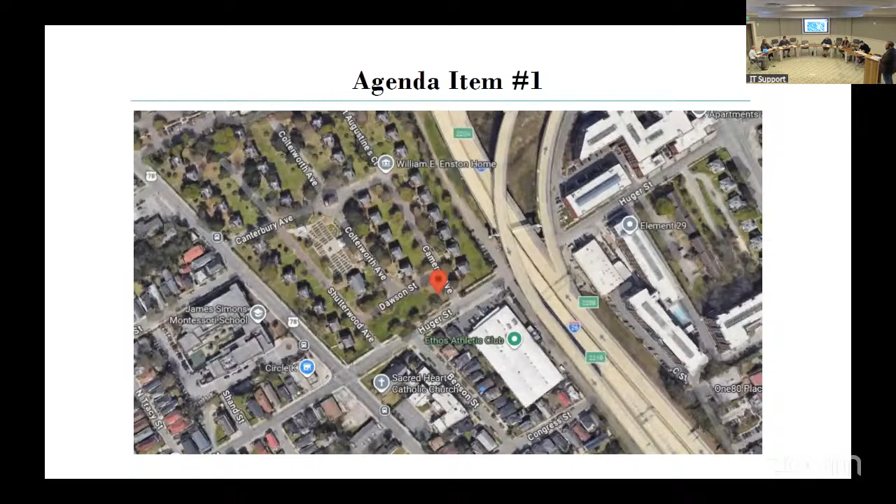Lawrence is going to show us the location of the project. Then we can move to the applicant presentation.

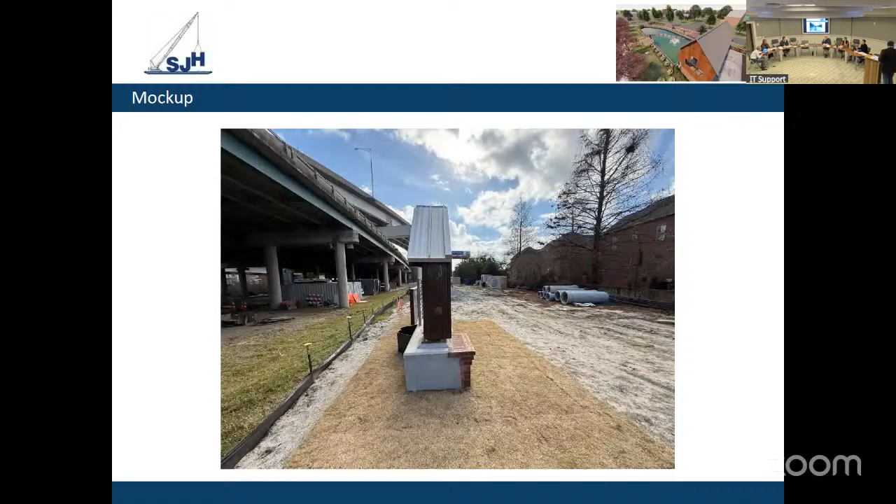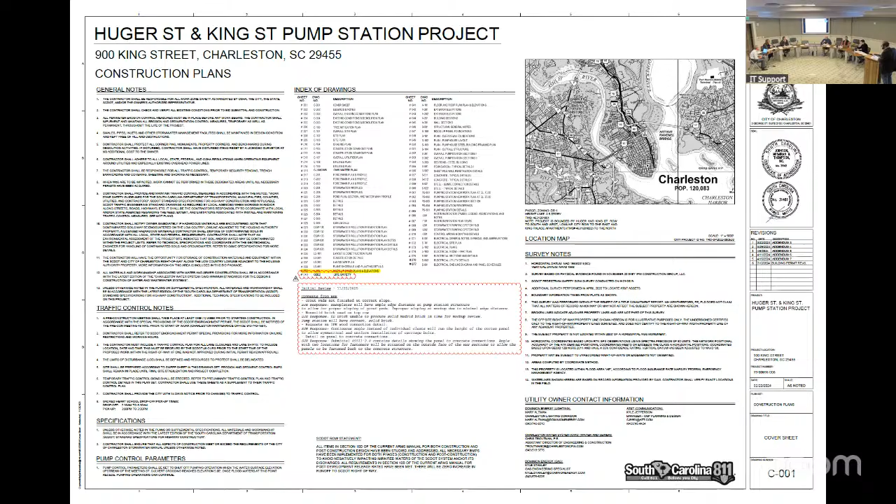And I think it's drawing C-100. I'm thinking about a clip that I saw. There's 2 pages marked A-100, and then there's an E14. Last time I didn't have my glasses, I forgot my laptop. It almost looked like there was a clip used in lieu of... instead of the bolts, I think you're looking at E14, I think is actually the one. E14, right. I'm sorry, E14. That's exactly right.

It's in matching details with the fasteners. Yes. Which one is it? It's gonna be this detail here that is from the construction plans.

And the roof - Lawrence and I were talking earlier about whether there's a roof you're matching at the Enston Homes with what we see up there, the most recent metal roofs around the garden area. But no, those are different - so what you put up and what's on that timber frame building is not the same. And that middle seam in that picture, it's not turned down at all, it just laps over and hasn't been turned into itself. On the edge, it's just got some screws that hold that down rather than being locked onto any type of drip edge or anything like that.

But the roof that's on that timber frame building and the roof in the mock-up are not the same. They're not the same material, no sir, but it's the same color. Is it just for color? Yeah, it's just for color in terms of... I thought the color was good.

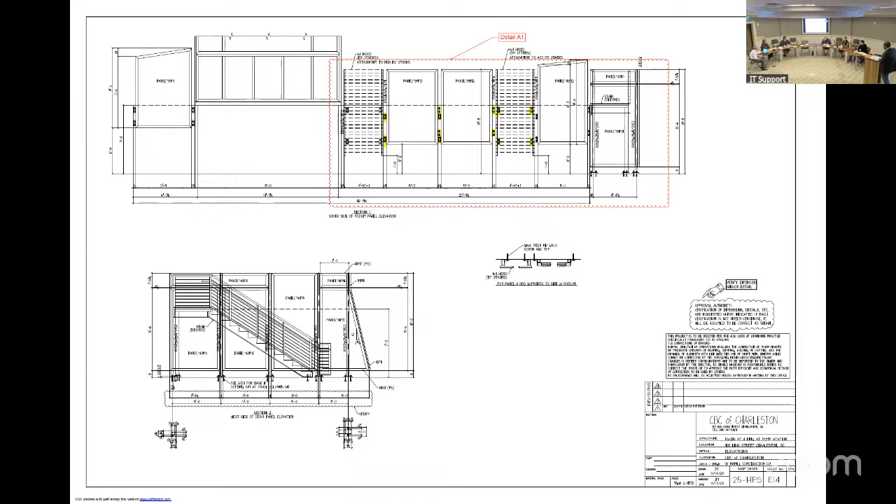Any other questions from the board? All right, thank you so much, appreciate that. Yes sir, any public comment? All right, great. City staff comments and recommendations, please.

This project previously received final review by the board on September 14, 2022, and was previously addressed as 900 King, in case anybody at home is wanting to find it. And final review by staff of the permit drawing set on April 9th, 2024. The next bullet is what we've kind of already seen through some of the Q&A, which is anything that appeared on the mock-up but would be different on the building, because mock-ups or peculiar things have been outlined in red and noted by the applicant.

I'm going to mention some of the things that came up in the final review, just because there's been such a long gap between then and now. Board discussion regarding whether the brick color should match Enston Homes was open-ended. The final review applicant discussed color with staff, and an approach for the brick to be monochrome with the Corten was decided in fall of 2025.

The final review applicant selected the brick from US Brick along with the mock-up applicant. The mock-up applicant was unable to obtain solid modular brick from US Brick for the mock-up, and the modular brick as shown in drawings is no longer available, but Queen is. Staff are comfortable with the switch from modular to Queen. The brick is perhaps redder than a true monochrome match, but we're fine with that, and it's required that any exposed brick be solid.

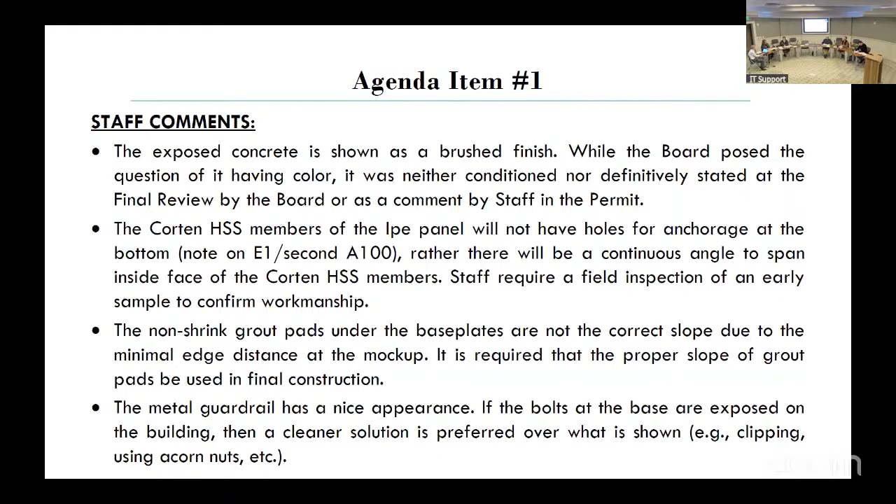The standing seam roof is a lighter gray than shown in the render, but the intent by the applicant was to match the pergola in the garden in terms of color, as mentioned at Enston Homes. Staff has confirmed that it does, and no comments on roof color were made at the board final review either way.

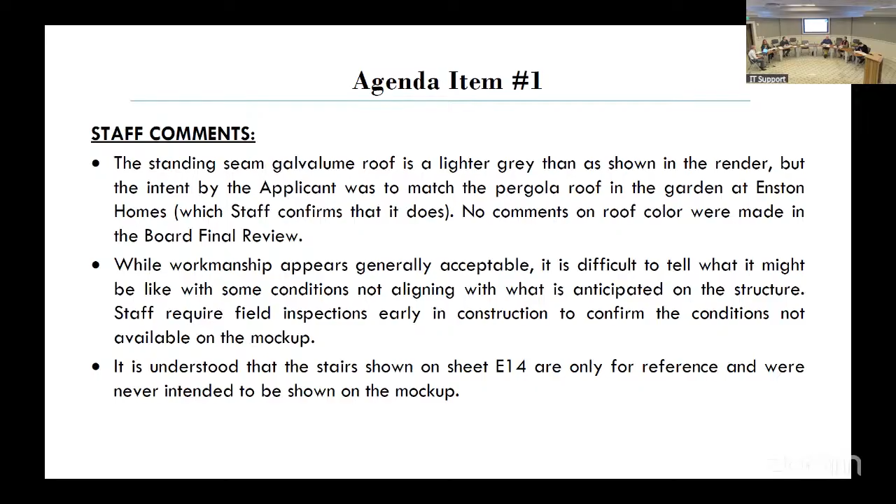While workmanship appears generally acceptable, it's difficult to tell what it might be like with some conditions not aligning with what's anticipated on the structure. So staff would like to require field inspections early in construction to confirm the conditions not available on the mock-up. It's also understood that the stairs shown on E14 were just for reference purposes only, and that we never intended anyone to build those stairs.

Staff conditions: exposed brick is required to be solid. Use of an angle to span the inside face of Corten HSS members is required. Proper slope of grout pads is required. Restudy of the finish condition on bolts at the base of guardrails is required if they are visible to the public right of way when installed. And early field inspections by staff to confirm workmanship on elements not shown on the mock-up, with a recommendation for approval with board and staff comments and conditions.

Thank you so much. For the applicant, do you have any response to the board comments and recommendations? No. Great, thank you so much.

All right, we'll move into board discussion. I guess I don't have much to add. I think all the discussion I had on site has been noted in staff's comments and conditions. I agree with every single one of them, and any additional conditions the board may have. All right, thank you, Mr. Trantham. Anybody else have anything?

Mr. Chairman, I make a motion for approval of the mock-up panel, incorporating board and staff comments and conditions. All right, is there a second? I'll second.

All right, so the motion is approval of the mock-up panel with board and staff comments and conditions. Mr. Trantham, how do you vote? Yay in favor. Mr. Brown? Yay in favor. Mr. Metters? Yay, I'm also in favor. The motion passes. Thank you.

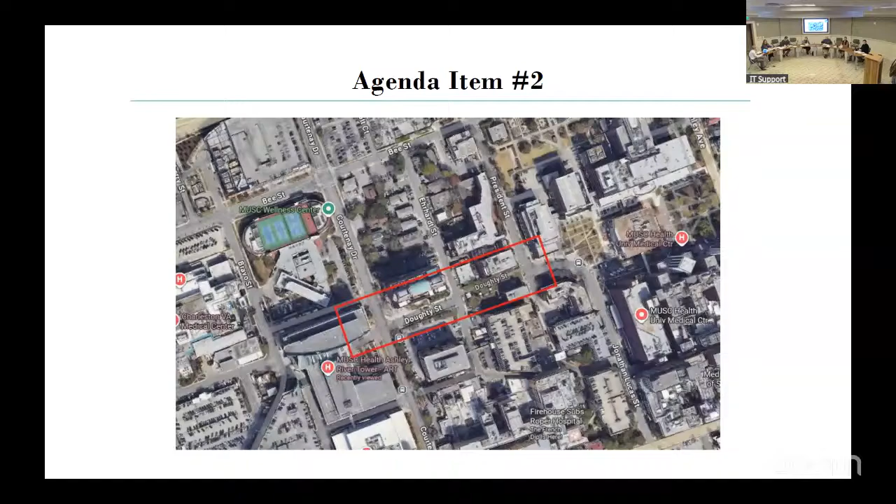Lawrence is going to show us the location of the area for the sky bridge, elevated walkway, pedestrian connector—lots of phrases floating out there for it. And we'll be ready, Mr. White, for your applicant presentation. Great, thank you, and I'm going to try to keep this to 10 minutes. I see no reason this needs to be as long as the bridge itself. Jay White, Liollio Architecture. I'm joined here with colleagues from Liollio and staff out of Atlanta, and of course the estimable Wade Gap, MUSC.

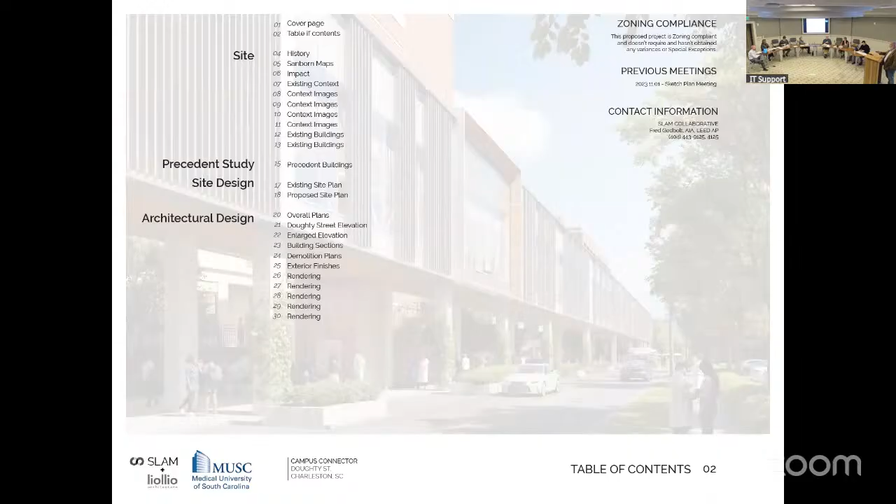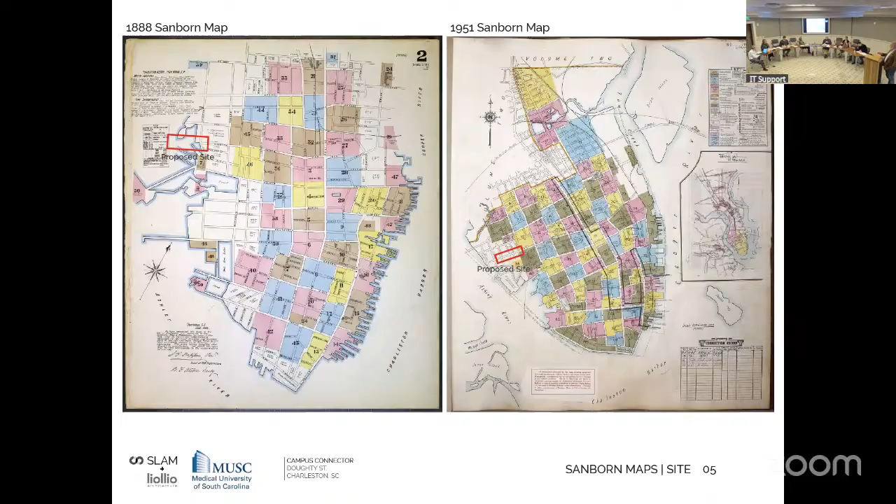So this project has been a long time in the making by MUSC. It is finally funded—funded directly through an appropriation in the state budget last year. While it's a piece of architecture, this is a resiliency project for MUSC. I'm going to move quickly through this. Y'all are familiar with the site, going back far enough on the clock, and this is Ashley River, not dry land. Thus the conundrum they find themselves in.

Sanborn maps are included in the application. This bridge connects really four buildings on campus: Ashley River Tower, crossing Courtenay Drive, which is an SCDOT right of way, running along the length of Doughty Street, connecting to the Thurman Gazes Research Building, the Psych Institute, then jogging over and crossing President Street, another state right of way, and connecting into the Bioengineering Building. It's almost 1,000 feet—the longest thing you're ever going to look at.

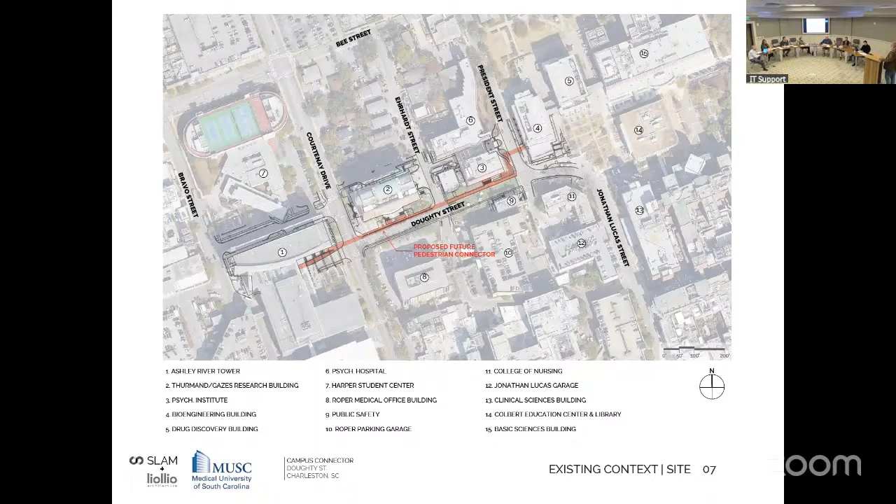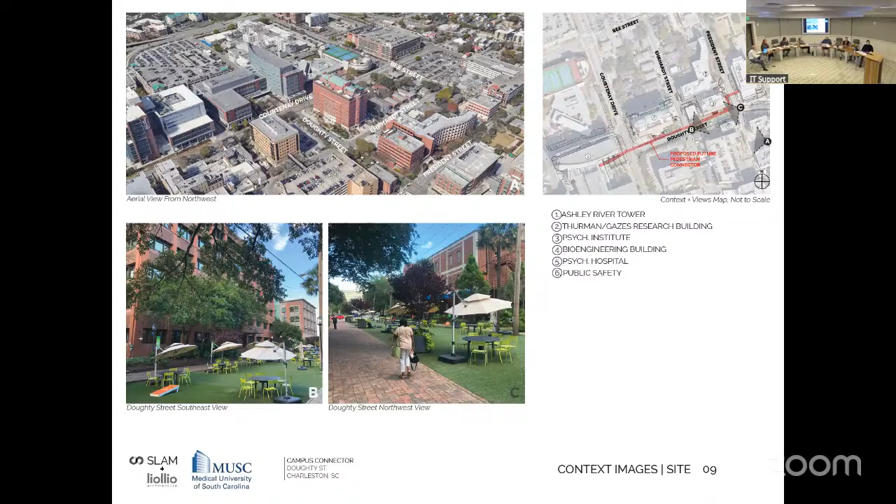But it is one of a network of bridges you don't even really notice on the campus. They're all over, especially in this older portion of campus. Once this is done, you'll be able to go from Ashley River Tower in sort of a clockwise fashion all the way around through the rest of the campus and end up on Calhoun Street. But this is probably the most architecturally deliberate expression of any of the bridges, intended to elevate pedestrian traffic—not only for clinicians, but for students and patients—as they navigate the campus during high water events. Of course, a portion of the street now in Doughty has been converted to the greenway. You'll see that in renderings here pretty quickly.

We did include some precedents here to show how other healthcare organizations have handled this. One thing I'll note, and you'll see this in the building section, is that this also provides an infrastructure pathway for the university for pneumatic tube systems, HVAC, high pressure steam lines that, if they were to go underground, would have to be pile supported. Instead they will be supported on the pile supported pedestrian bridge, which explains the height of its section. I'll get into that more.

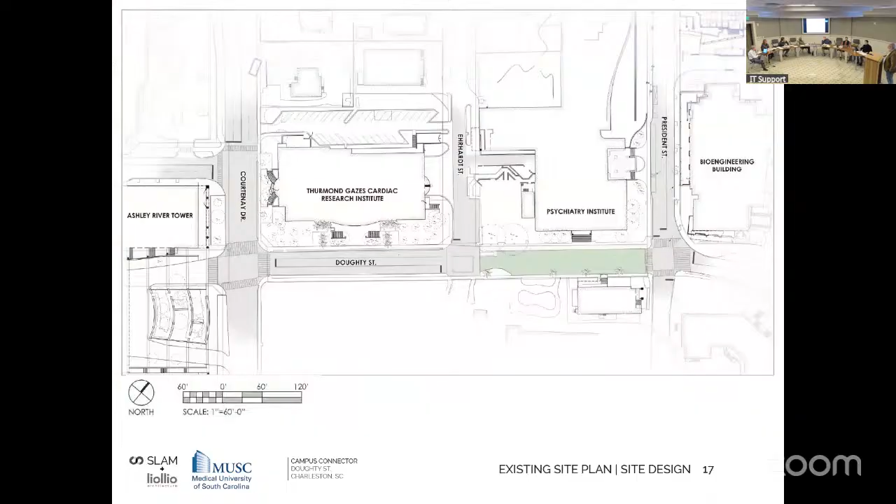Site design, I've already gone through this. This is the existing condition, and the condition as it will develop. The bridge effectively straddles the property line along its whole length of Doughty.

While each of these four buildings actually has a distinct second floor elevation above sea level, the bridge visually will be flat, level along its entire length, with slight ramping internal to that to mitigate the differences in floor height.

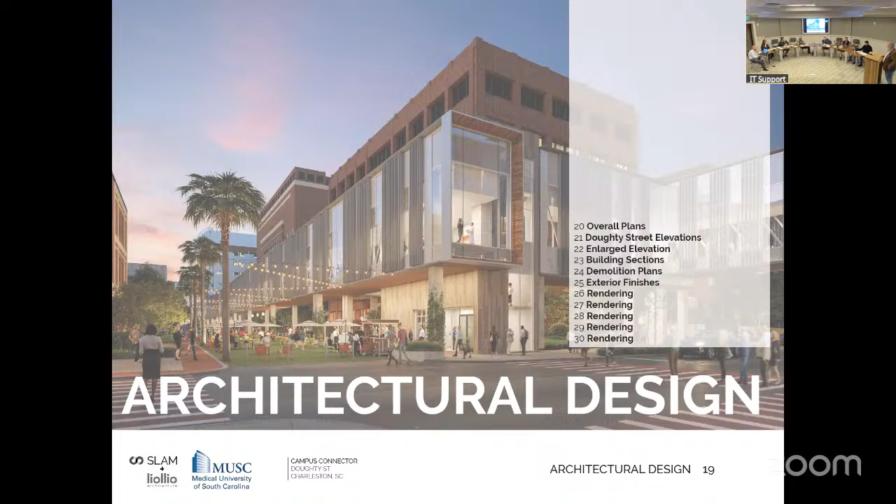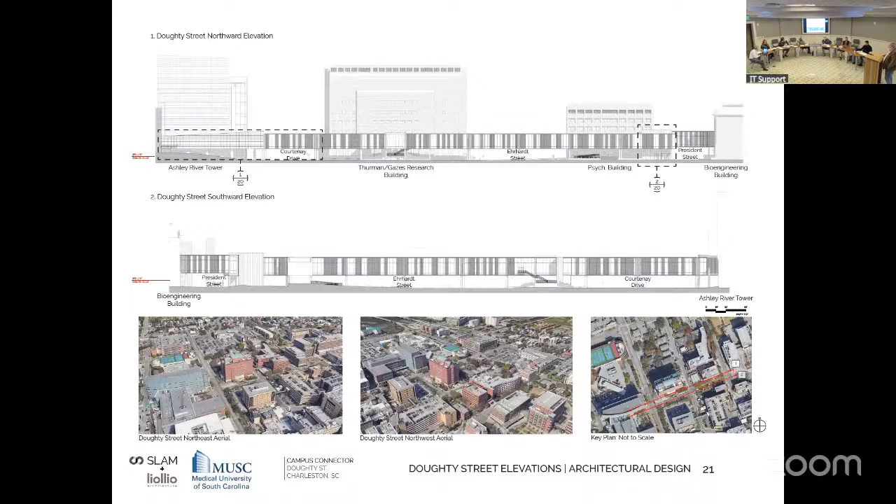Ground floor plan, second floor, and roof plans, and then this is the elevation. Streetscapes, that's important. And this is important too. This is what it looks like when it connects to Ashley River Tower.

For this section of the bridge, we are actually adding onto Ashley River Tower, and then the bridge starts here. In order to accomplish that, we're going to peel off the lowermost section of that huge arcing curtain wall from Ashley River Tower, and then engage this with it. There are some diagrams to follow.

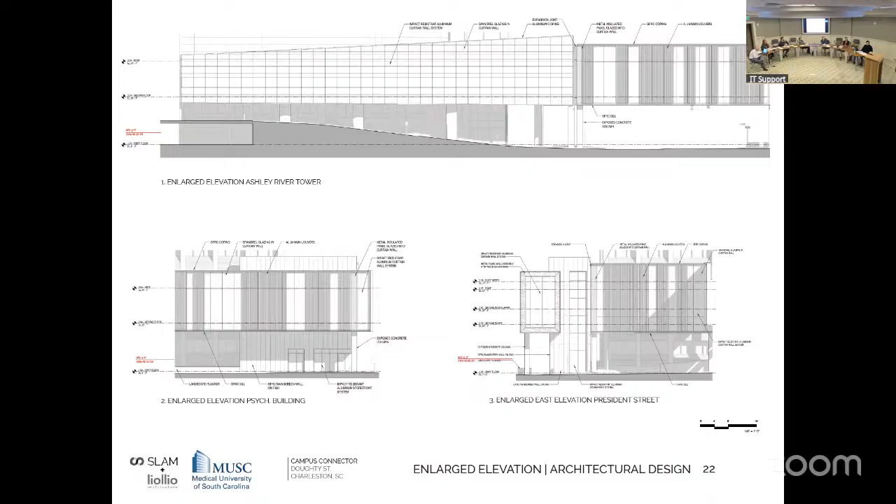These sections are helpful in explaining what I was describing earlier. The bottom of the bridge is about 18 feet above the ground, and that varies with topography. The enclosed volume is about 25 feet tall, also because of a very tall parapet to disguise all the rooftop infrastructure.

This is actually the shorter version of this project. There was an earlier, more expensive one that had two levels in it. But this is the pedestrian zone, and this floor will slope.

The basic material palette is largely curtain wall with aluminum louvers to mitigate the sun, with glass fiber reinforced concrete trim at top and bottom, and cast in place concrete columns that support it above the street.

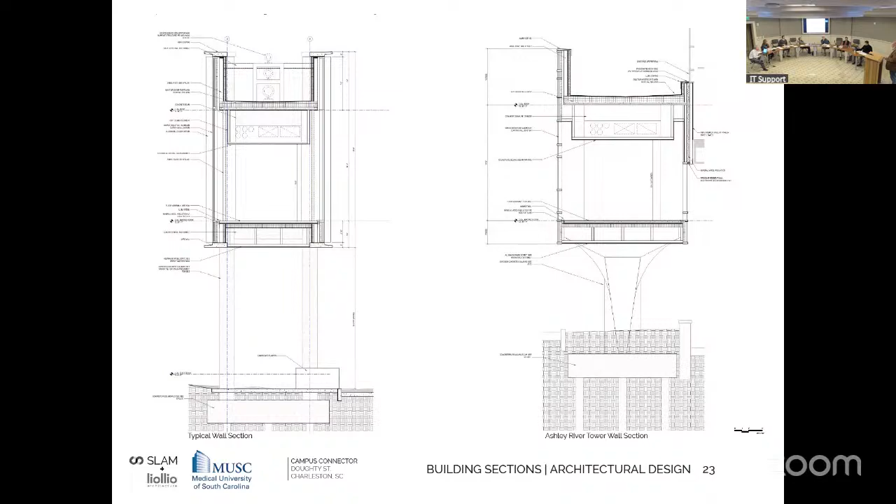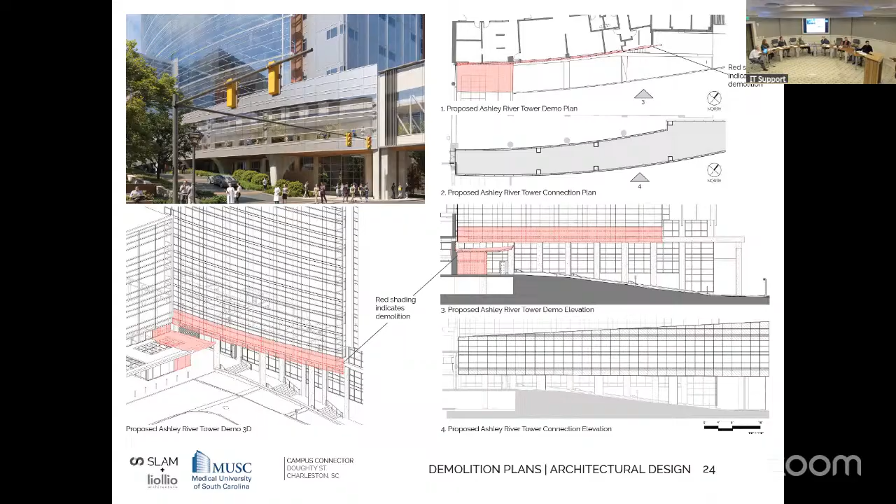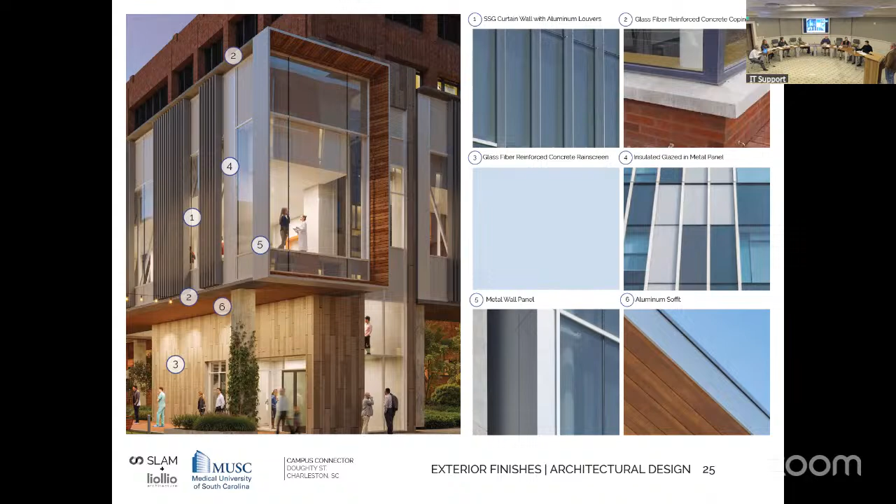I would say the overall height of this seems rather exaggerated, but it's not that far out of scale with some of the taller buildings that line King Street and frame that pedestrian experience.

Here it is standing in the middle of the street looking back down Doughty Greenway. This is where it jogs across President Street to connect up to the Psych Institute. It touches down on occasion—you can only go so far down this thing before you have to have a means of egress.

So there'll be several of those. This is one, stair and elevator. There's another one about mid-block.

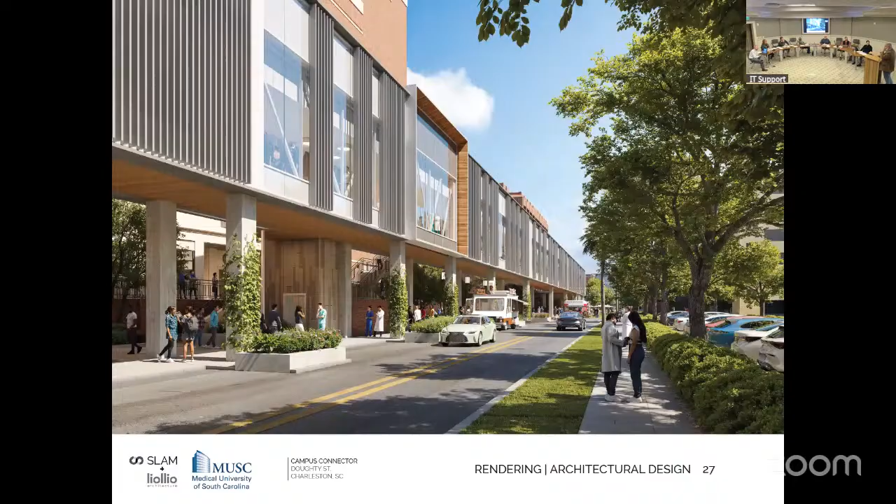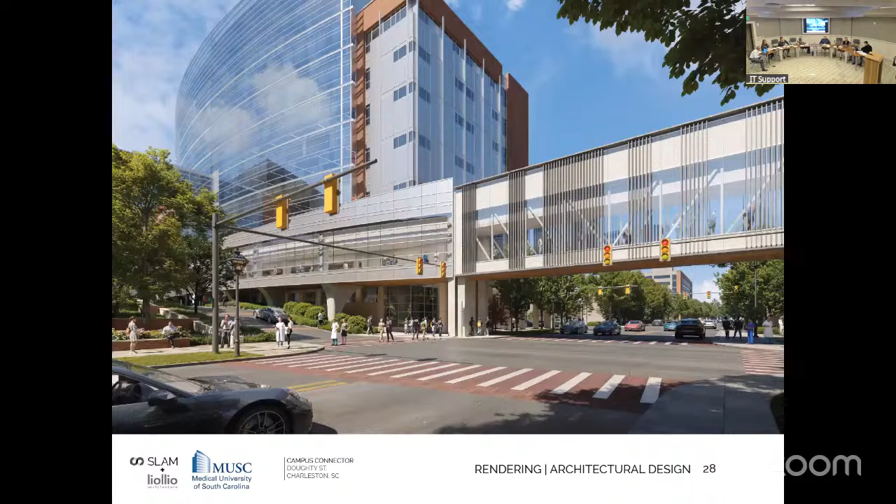There's another view down Doughty looking east. These portals express the touch points where the buildings engage with the bridge. And then this is back again, Courtney looking back at Ashley River Tower.

This is looking north on President. The good thing about this is that we are able to obscure the view of some of the more unfortunate buildings on MUSC's campus.

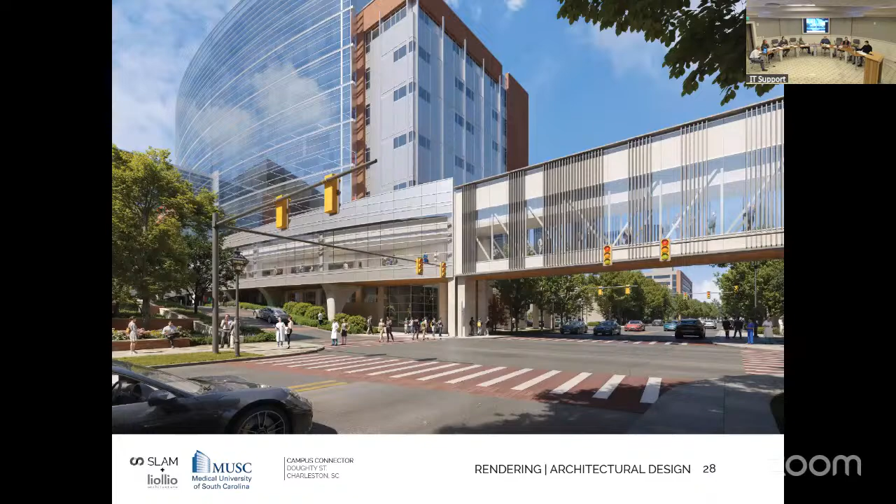And then this is the aerial view we included just to give you a sense of the scope of this project. Although obviously this is not the way you experience it—the experience will be much more like this. And with that, I'll take any questions you have.

Awesome, thank you, Mr. White. Any questions from the board?

I have a couple of questions. What was the rationale behind the patterning of the vertical louvers that are running down the roof?

Well, it's a barcode off the bag of Skittles. No, I'm kidding. It was just sort of something that we came to rhythmically. We didn't want something that was a strict repeating pattern for fear that it would become monotonous.

I think you kind of alluded to that too, and the aluminum clad kind of wood look panels, those are, in your understanding, kind of soften the experience that's there, and then as it's brought up, kind of frames the openings, the larger openings that are there.

Yeah, and with that ceiling being significantly above that head, we weren't really worried about using that product. I mean, normally if this thing were within reach, we would be very concerned about using any sort of synthetic alternative to wood, but we also do have to consider the maintenance that MUSC would have to think of. They actually use real.

I had one other question. Just, I don't know this necessarily, but the turn that's happening at the terminus. Instead of continuing the line down, what was the rationale behind having it kind of turn back?

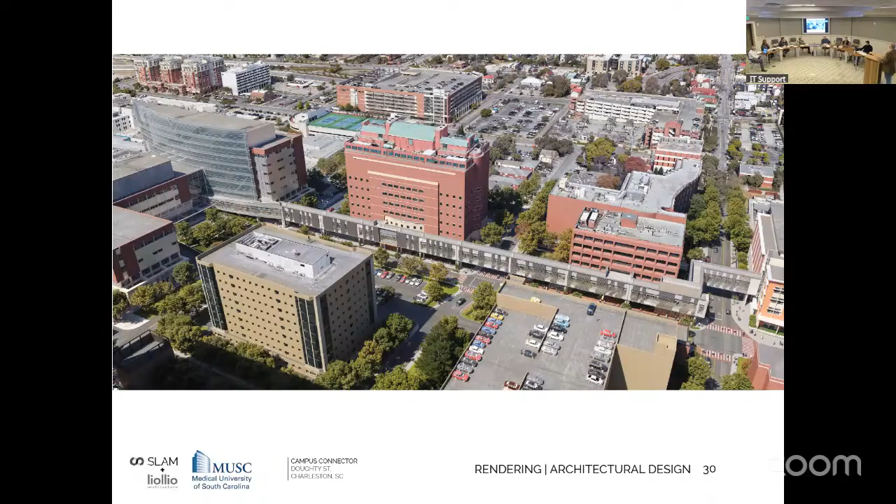Find a better view here. We still need to think about the actual connections that are behind here. Because there's about 20 feet between the bridge and each of the buildings it connects to, and the expression of that linkage needs to be deliberate.

We need to really think it through, but it's something that we're sort of holding for the next phase of design evolution. But it needs to have an expression that makes it seem as natural as it does at Ashley River Tower. And I want to make sure that what I'm saying is clear.

If I'm looking down that big long, and that is the connector, and when it went in front of one of the buildings, was there consideration given to that section in front of that building, to reflect the architecture?

Reflect the architecture of that building, and then what's in between those is a reflection of open space, green space, still enclosed. Oh, I see what you're saying.

We did study a lot of versions of that, but frankly, even within the institution, everybody's got their sort of beauty contest ranking of all these buildings, and we did have some sketches many years ago, and we just couldn't really bring ourselves to replicate Thurmond/Gazes.

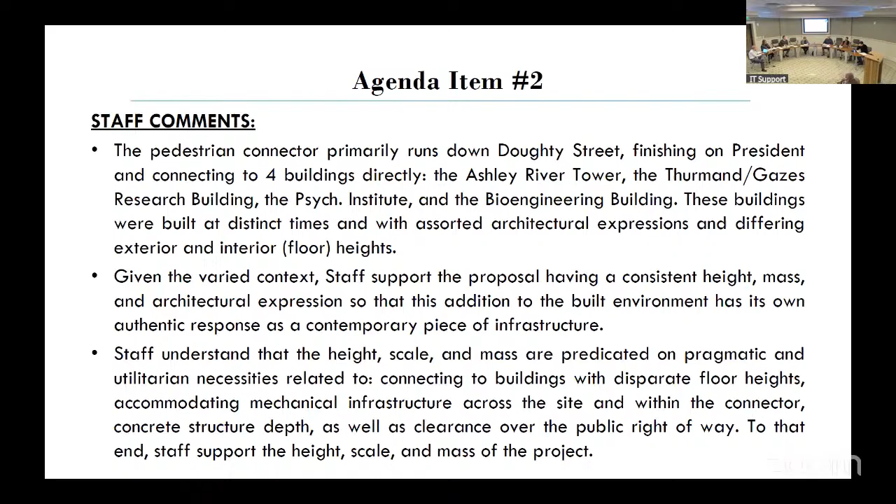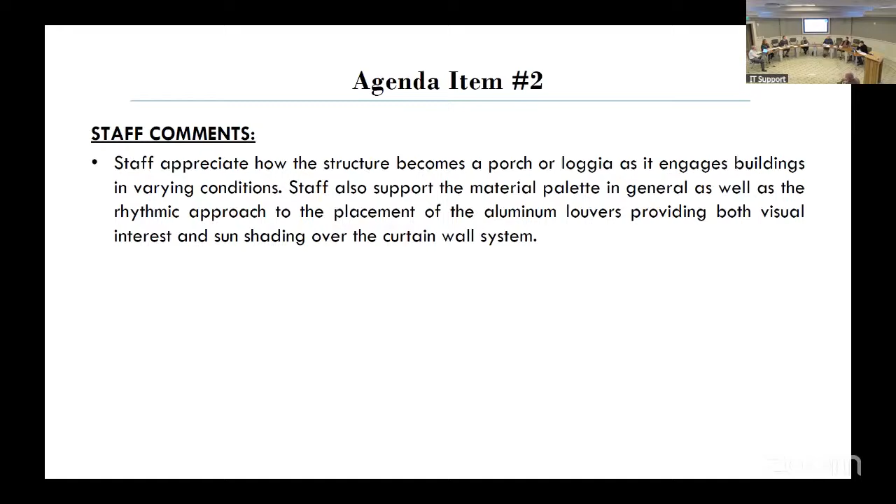Staff appreciate how the structure becomes a porch or loggia as it engages buildings in varying conditions, and staff also support the material palette in general, as well as the rhythmic approach to the placement of the aluminum louvers, providing both visual interest and sun shading over the curtain wall system. Staff conditions: bring sample materials to the preliminary review. Staff recommendation is for conceptual approval with board and staff comments and conditions.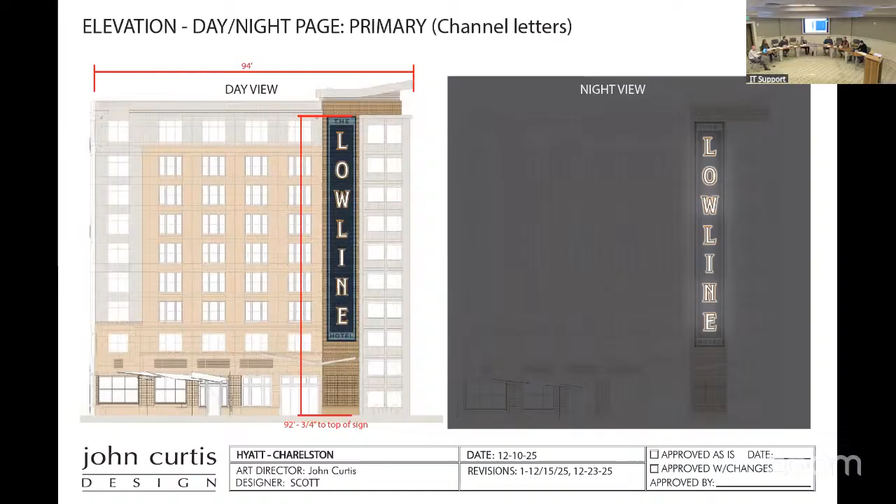Any public comment on this? All right, city staff comments and recommendations, please.

And sort of like the previous project, the first page is just outlining which part of the ordinance is applicable here, as well as our policies, but I won't include them all, it's just getting on the public record what is applicable to these particular requests.

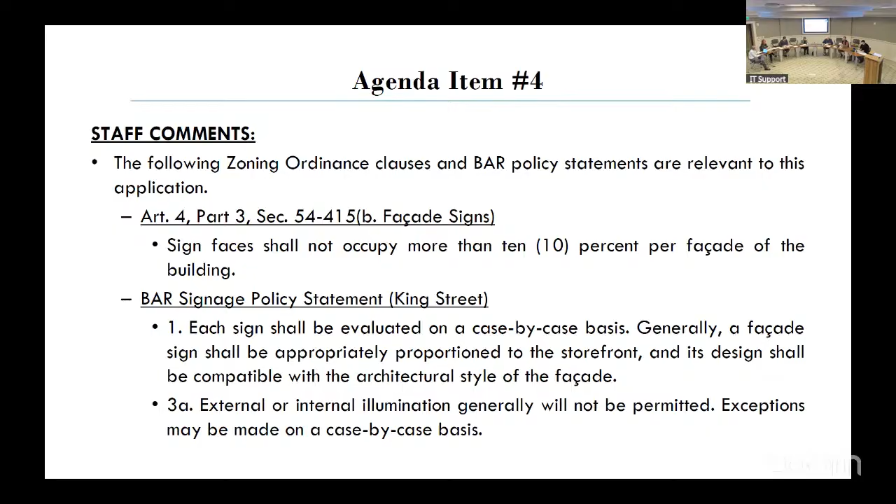The next slide: staff support the overall graphic design of the sign, as the colors and typography are professional, lack extraneous information, and are compatible with the building's architecture. However, staff do not find the sign scale, method of illumination, or the lack of clarity regarding its brightness to be approvable. As proposed, the facade sign is over 600 square feet. Although this technically complies with the zoning ordinance, which is set at 10%, the BAR retains the discretion to reduce the sign if it's determined to be inappropriate in scale or design relative to the building and its immediate surroundings.

Lawrence, can you actually go back to the photograph, the orienting photograph, instead of just having the verbal comments? One more. For us, it relies on this: technically, the size of that almost 70-foot sign is 10% of the entire facade, but you don't actually see the entire facade from the street. This is what you see from the street.

So for us, that's the issue: while technically they meet the 10% of the facade, the viewable part of the facade is much, much narrower. And that's why staff couldn't approve this at staff level.

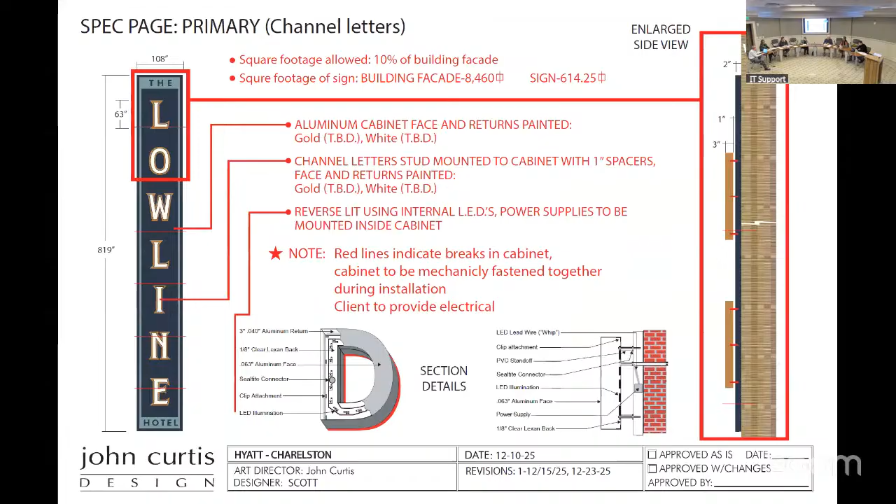And Lawrence, let's forward till we get to the staff comments that start with respect to illumination. There we go. With respect to illumination, the applicant proposes individual illuminated channel letters. Staff recommend an alternative illumination method such as halo lit letters, which would result in a less visually prominent sign, particularly at this scale.

Staff also requests clarification on the proposed Kelvin temperature and lumen levels, which were not provided. While the sign must remain legible, staff find that the overall size and illumination method of the sign should be reduced and refined to better relate to the visible portion of the facade and to be more compatible with the context of King Street. Staff condition: if the overall design of the sign is approvable by the board, but the size and illumination are not, staff requests that the board provide a general comment on size or general lighting specifications that they feel would be acceptable, with final details and review left to staff.

In other words, we are happy to do this at staff level if the board goes on the record with what they would want to see happen to the sign instead of having to come back to the board. But we recommend denial of the facade sign as it's proposed in this submittal.

Right, thank you. All right, any response from the applicant?

Thank you for that very much. That's the exact feedback we're looking for, is what size is acceptable. Regarding the comment of what's visible from the street, that's one of the reasons for the size, because it's smaller. There's no other way you would know that building is there. We don't have the ability to look at that today, but maybe on the staff level we could go back and forth on that.